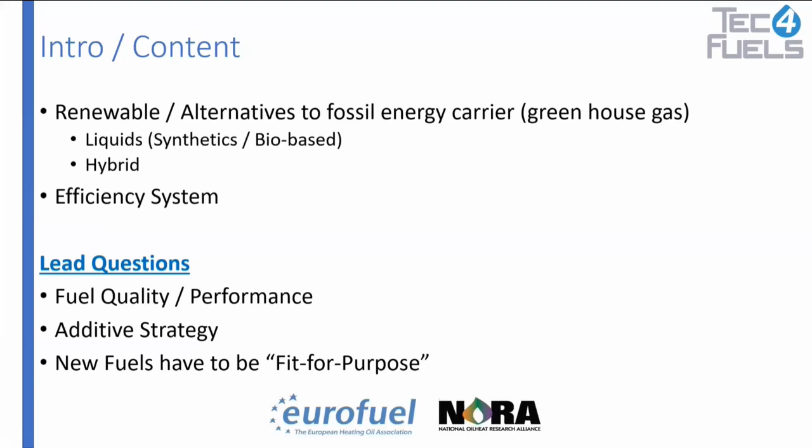But first of all, a little bit more general approach. New fuels, before market introduction, have to be fit for purpose. And what this means, I will show you on the next slides. If I change now the point of view as a manufacturer or chemist or biotechnician, and I've created the most brilliant fuel ever, which is CO2 neutral, less consumption and no soot formation during combustion, and I know it's really good, I'm pretty sure I shouldn't put it on the market before testing if I want the acceptance of the client. So before market introduction, new fuels should be tested.

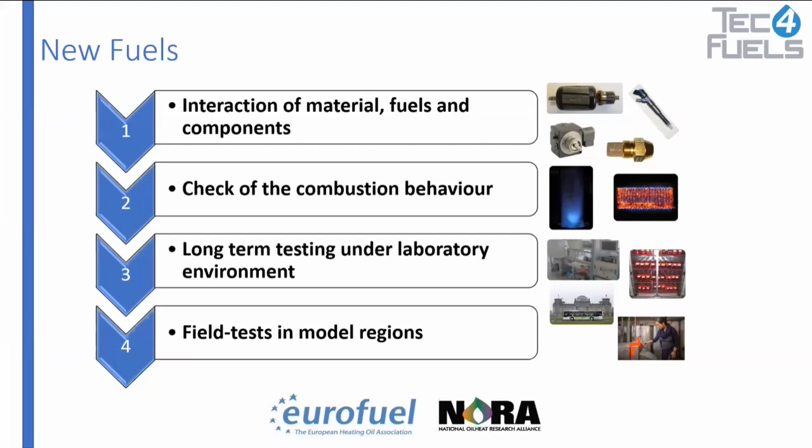So first of all, the interaction of materials, fuels and components, at least as the first step. Because I want a wide range of clients. So if my fuel is only working in new systems, maybe it's not so good. So a second step, check of combustion behavior, also the long-term testing in the lab, and last but not least, the field test in model regions. So is it working in the field or not?

The fuel material interaction can be tested in various ways, depending on the effect you want to look at. So I would like to give you an overview of some static compatibility tests. We see here on the right side some storage of elastomers or metal plates or metal components of the whole system in order to check for the operational safety. So do we have swelling or corrosion on the material?

Here in the storage. On the left side, we see the fuel aging itself. So it's a long-term stability test at different temperatures. Here's an example with glass bottles with and without a copper coil as a catalyst. And that's a kind of accelerated test in order to build up the aging in the tank of the customer.

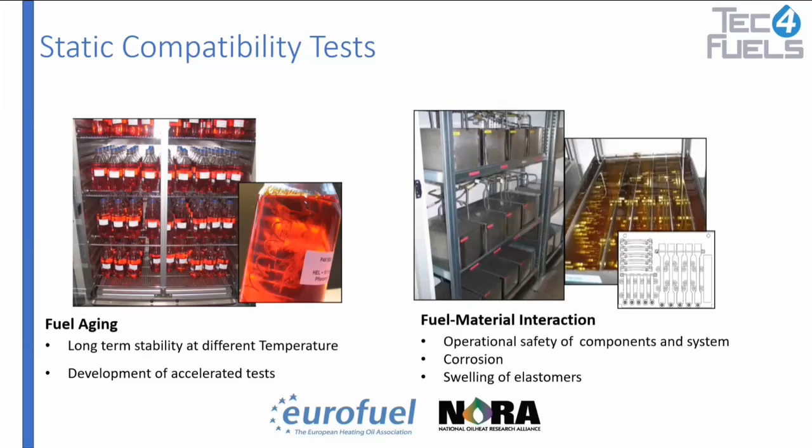As an example, I would like to show you some pictures of such a long-term storage in the glass bottles. Instead of all the analytical data we measured during the storage, I would like to show you just the bottom of the glass bottles. And we have here two time periods, 12 and 18 months, and some different fuels tested. So starting with the B0, it's a domestic heating oil, fossil-based. It shows quite good performance with no deposit formation.

And if we then add some fatty acid methyl esters, 10% or 20%, B10, B20, we saw a huge amount of deposits during the storage. And this can be avoided with additive treatment. Here we see on the right side 12 months and 18 months with no deposit formation.

But the point of this slide is I would like to mention that all these analyses we did during the storage, or if we have a standard analytic in the lab, none of them are focusing on or including the deposit formation. So if we have a sampling in the customer's tank, we will never sample the deposit formation for standard characterization of the fuel. But it's one of the most important issues if we have this deposit formation afterwards in the system. And this should be the point of this slide.

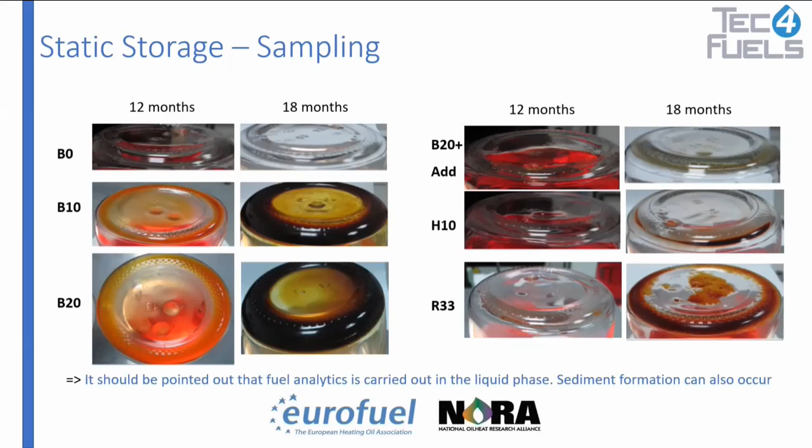So the second step after the lab test was the combustion test or combustion behavior. So we did already some tests in this field, here as an example with the domestic heating oil and some hydrogenated vegetable oils, H100. And parallel to the combustion behavior tests, we also had the long-term storage. And we saw here in all the pure fuels, as well as in the blends, no significant change in the physical-chemical characteristics.

But if we then tested them in the burner system, as you see here in the slide, both pure components show nearly no deposit formation or any malfunctions in the system. But if we take a look in the first line, we saw the iso-H50, so it's a 50-50 blend of fossil fuel and the vegetable oil. We saw a huge amount of deposit formation on the nozzle. If we check the filter below, you see already that the blend itself has an issue with the deposit formation, while the pure components have no malfunctions.

So it's always a topic. You see it on the left bottom. We need the efficiency of the system, okay? We need the storage stability of the fuels, and we need the operability of the whole system. And I think all these 3 points have to be pointed out with the new fuel. And that's why we do this testing here.

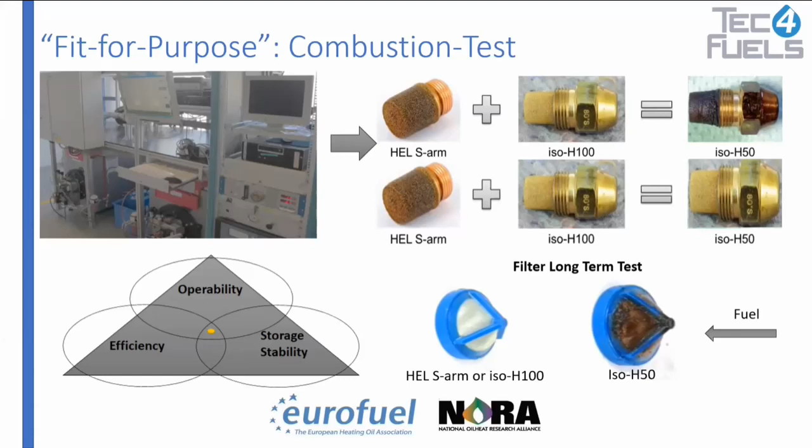As mentioned before, I would like to focus in this talk a little bit on the premium fuels, so what is possible with additive treatment. And first of all, what is a premium fuel? So in Germany, the BDH, the German Association of Manufacturers of Heating Devices, made a wish list or a definition of what is necessary to be a premium fuel. So first of all, we need long-term storage stability, high thermal stability, but also some corrosion protection, protection against water take-up, keep clean, some resistance against microbial contamination.

Odor, okay, it's also in. And the last point, no ash forming additives, I think that is also standard in Germany. That's not a premium-like fuel. But if we go through all these points, most of them, or nearly all of them, can be affected by an additive treatment. And this is what we take a look at in the next slides.

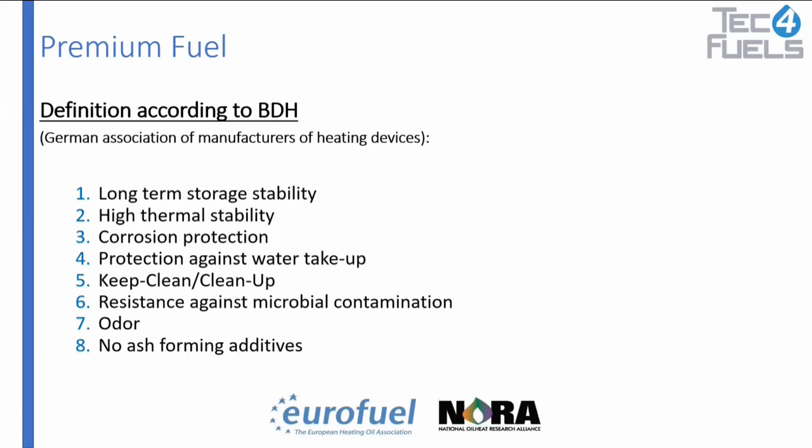There are a lot of additives in the market, so I think it's not a problem to find an additive if you want to face one of the effects. To keep the system clean, take a detergent. Do you want an increased storage stability? Take some antioxidant. I think the main challenge is the additive mixture. So you don't want to face just one of these effects, you want to face them all.

So the challenge is to find or to define a mixture of additives which are working in the fuel or in the system. And in this case, it's not important that it worked in one fuel, because the fuel itself has a broad range of characteristics or behavior. So you need a good additive mixture which works in every fuel in the best case. So if you want to test all the claimed effects, you need a lot of fuel and test time. Also, I think the biggest challenge is that if you create a new fuel, you don't have these huge amounts to test everything. So in this case, TEC4FUELS developed a hardware-in-the-loop test.

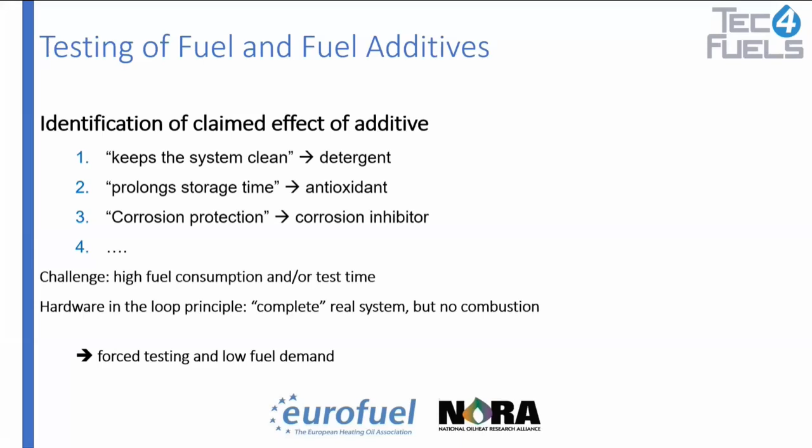So it's a complete real system without the combustion, and so we can reduce the fuel needed for the test, but also can test all the claimed effects in nearly one test. Before showing you some results of these tests, I would like to give you some background information.

So it's a stress test for the evaluation of an additive performance or the fuel itself. So we have a hardware-in-the-loop test principle. We have the complete heating oil system: the filter, the pump, preheater, and the nozzle. And we pump the fuel or the blended fuel through all the fuel-leading parts without the combustion in the end.

So we have a defined fuel aging. The light, heat, oxygen, copper, it's always the same parameters, so we can guarantee comparable results. We have a periodic fuel analysis in between, and further measurements, so flow rate and so on, which can deliver additional data regarding the clean-up effect of the fuel.

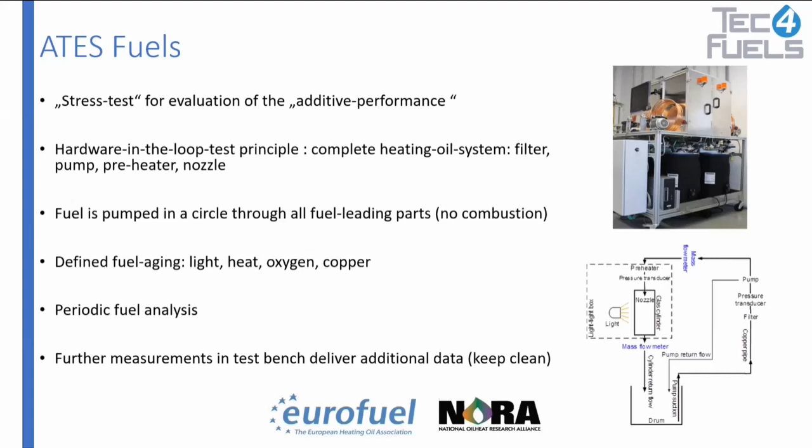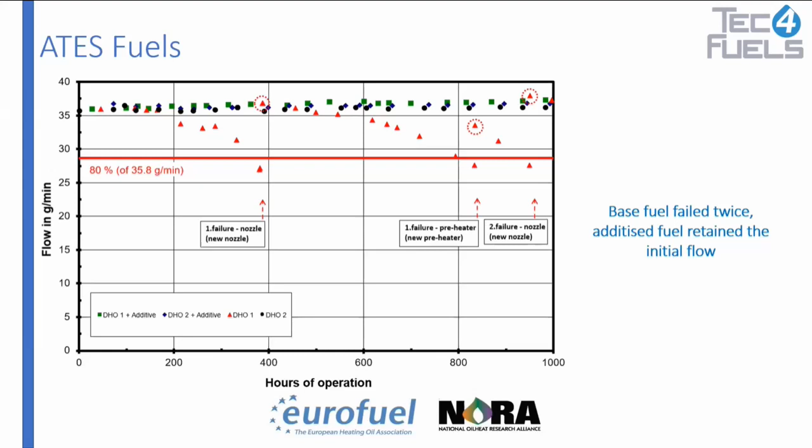But the point of this slide is that the additive-treated blend doesn't show any significant change in the flow rate. So the additive worked fine here in both domestic heating oils.

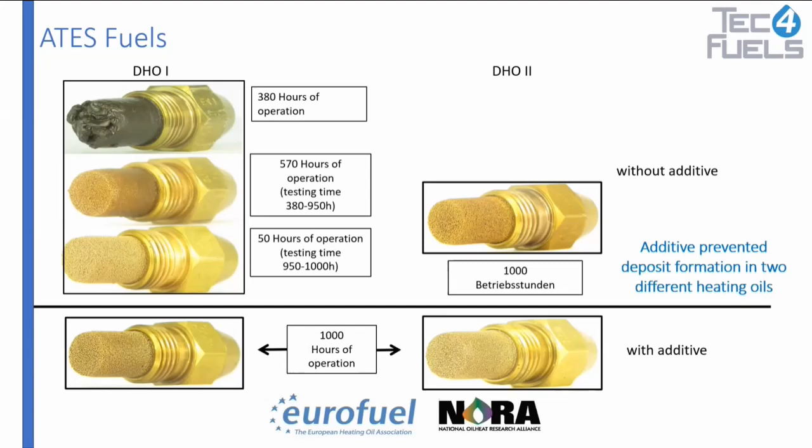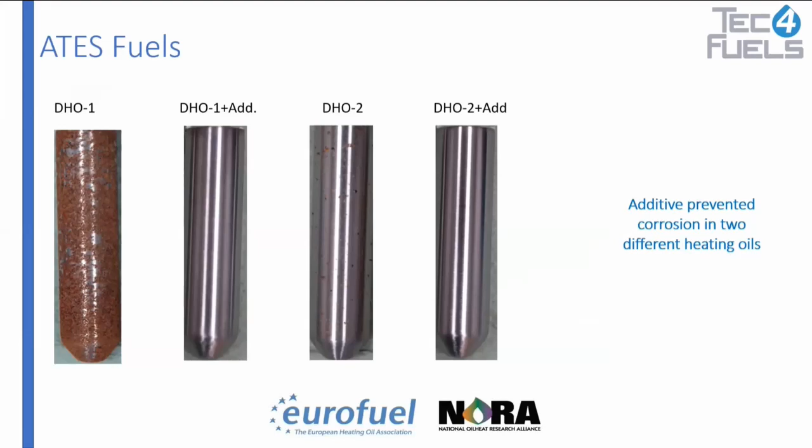In addition, the periodic analytics also include the corrosion test. After 500 and 1,000 hours, the fuel is also investigated analytically, and here we show that domestic heating oil 1 also shows strong aging and therefore corrosion on the test strip, and the additive-treated blends showed more or less no corrosion behavior.

In the last chapter of this presentation, I would like to focus again on oxidation stability. I talked before about the long-term stability in the glass bottles, and it also takes a long time, 12 or 18 months, before the final analytics are done. This time is really long. So we define an accelerated aging with really higher stress parameters. And I would like to focus now in the next slides on these test methods.

In order to have a much faster evaluation of the fuels regarding the auto-oxidation reaction or resistance against auto-oxidation, we defined this accelerated aging called BigOxy here. It has some similarities to the PetroOxy test. Maybe some of you know already about this. So we have really high stress conditions and rapid aging.

We can change all the conditions together with the customer. Pressures between 1.2 and 5 bar are possible, temperatures up to 250 degrees centigrade, or different aging periods. It's really flexible, this test, depending on the effect the client or the customer wants to look at. So it gives an initial impression of the long-term behavior of the fuel.

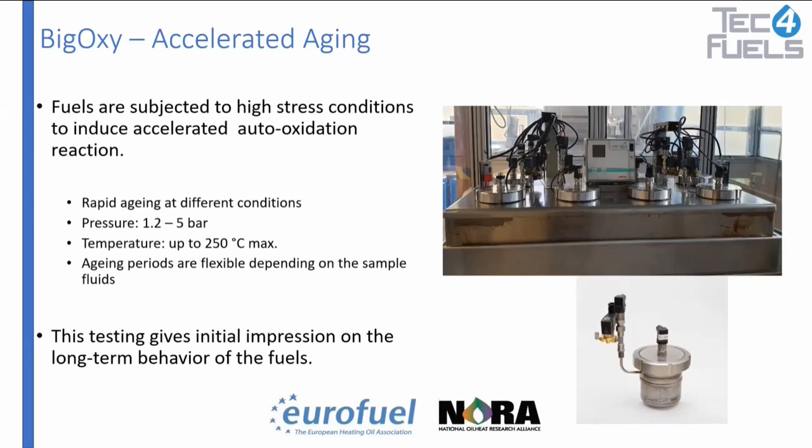For a few years now, we've been working together with Shell on the investigation of paraffinic fuels according to DIN 15940 and the effect of oxidation stability of these paraffinic fuels. Here we tested the Shell GTL fuel and compared it with a domestic heating oil.

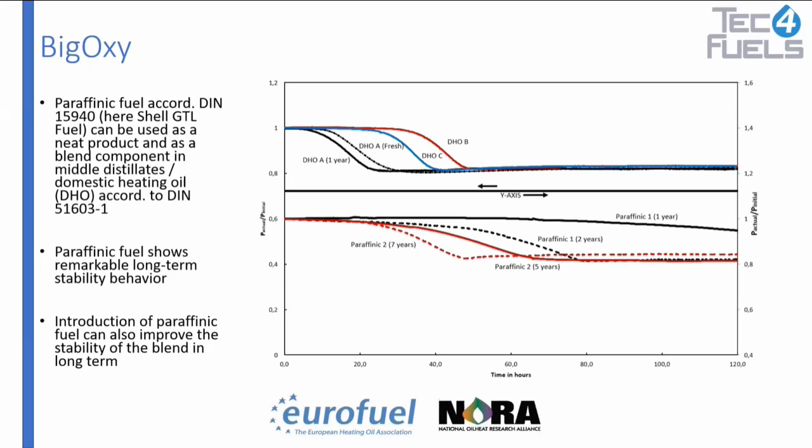And also, if we test the blend between DHO and the paraffinic fuel, it's not shown here, but in our investigations, we showed a really good improvement in the stability of the blend during long term.

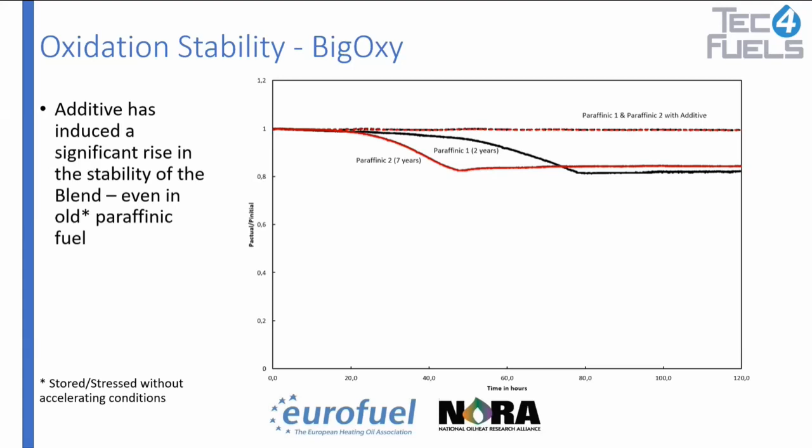Finally, I would like to sum up before I have to end the talk. The overall goal is the reduction of greenhouse gas emissions, and therefore we have to introduce some new fuels or new techniques to the market. And I think it's really important that we always focus on the whole system.

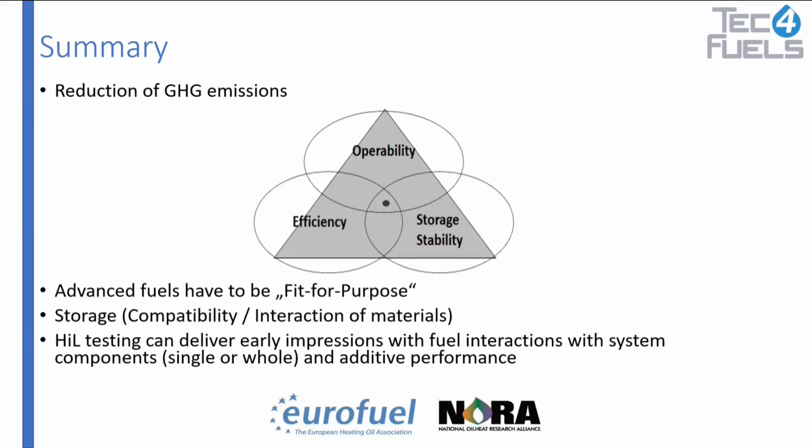So we have the efficiency of the system, the storage stability of the fuel, but also the operability, both together. Therefore, advanced fuels have to be fit for purpose and have quite good storage stability, and compatibility with the materials has to be tested. And I think I showed you with the hardware-in-the-loop principle that we can deliver early impressions of the fuel interactions with the system components, or what the additive performance will do with the fuels and the system.